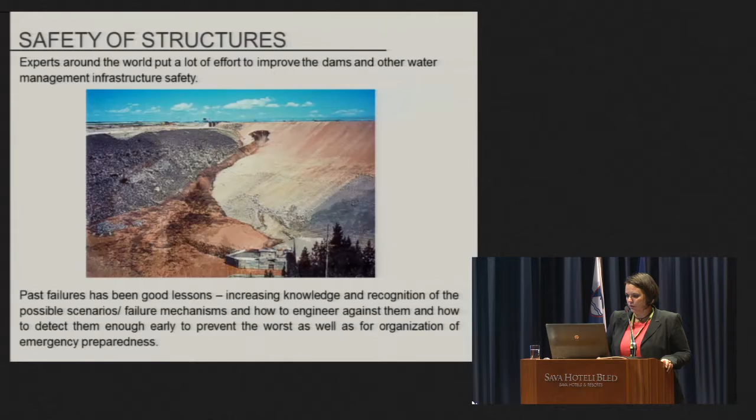So the construction of dams has been an issue from ancient times, and it has been beneficial to mankind. People still use dams as flood protective measures, as well as for other purposes such as hydropower production, irrigation, water supply, and so on. The experts agree that a well-designed, built, maintained, and operated dam exhibits a quasi-zero rate of failure.

However, there is no zero risk with dams. If we make an overview of the history of failure of dams, we see that on average, less than one dam out of 10,000 large dams fails. But no matter how small the likelihood of failure is, when these failures come, they can cause extensive damage and, in worst cases, fatalities as well. Therefore, we justifiably speak about them as critical infrastructure.

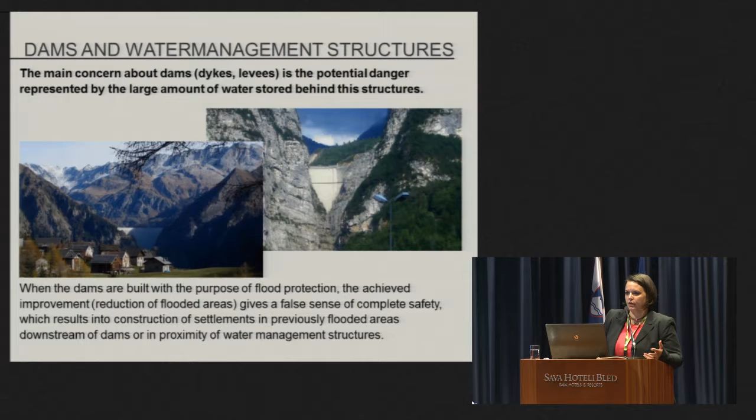So when we speak about dams for flood protection, dikes and levees, the main concern is the potential danger represented by the large amount of water which is stored behind the structures. The other point associated with these structures is that when such dams are built, they give a false sense of complete safety, which results in construction of settlements next to these structures. And the damage that can be caused is even higher.

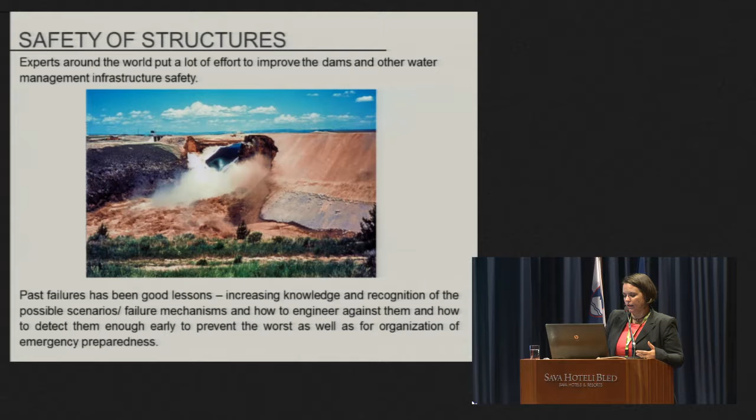So experts around the world put a lot of effort into improving dam safety, and now mostly they don't think only about structural safety; they don't use the deterministic approach and rather go to the risk approach.

So now I will talk about the VODRPEG project, which was financed by the Ministry of Defense, in which we reviewed the condition of Slovenian dams. Briefly, the VODRPEG project consisted of identification of all the dams that were possible threats, survey of the condition of these dams, review of dam break analysis, required remediation measures and emergency action plans, and raising of population awareness.

When making this overview, we found that, maybe due to lack of finance, the more critical were water management dams, since for hydropower dams more finances are available for monitoring and maintenance.

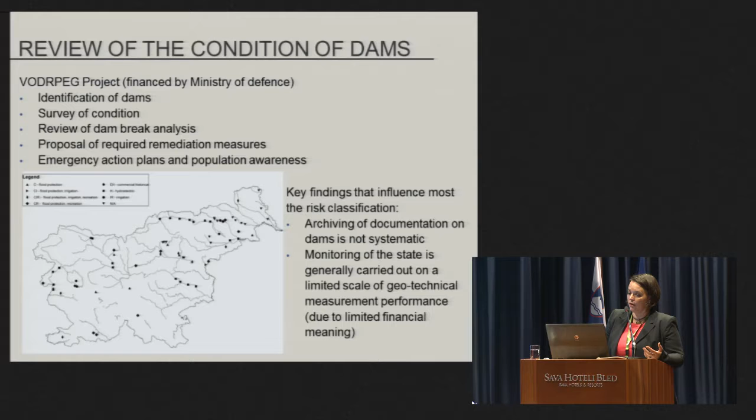The key findings that most influenced the risk classification of these dams were that the documentation on water management dams was often missing. It was scattered. The second was that monitoring wasn't carried out as it should be, also due to limited finances, and the data gained with this monitoring was not reliable enough to make a proper risk assessment.

So therefore we had to put all the analyzed dams on the same level, and we developed a qualitative assessment with which we cannot say that we were evaluating risk according to the definition, but when choosing the parameters, the damage potential was also included. So we could say that we were evaluating some hazard risk, something in the middle.

So we divided the parameters into 5 groups. The basic parameters of dams, which included height, storage capacity, discharge, and so on. Then the documentation availability, including the operational documentation, the designs, monitoring documentation, and so on. Then we analyzed the operating parameters and operating hazard, and to conclude, we made a field review and analyzed the state of structures and equipment of the dams.

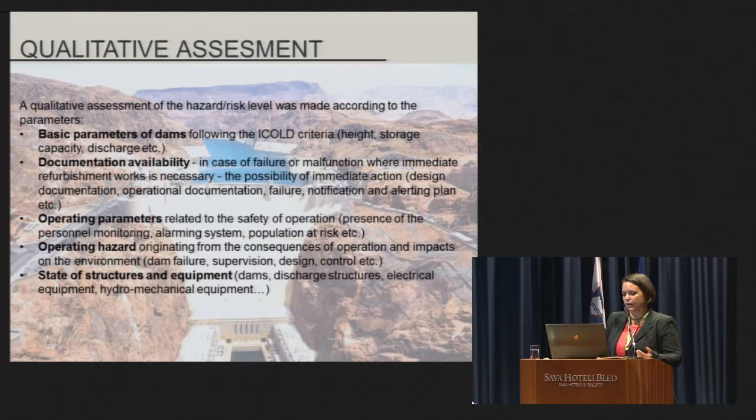So according to the significance of each parameter, we graded it into 3 levels. Unfortunately, we could not exclude the subjectivity of this assessment. It has been performed by experts, but it gave quite a good result. Finally, all these parameters were gathered together, and a 5-category risk assessment was established.

The state of the dams wasn't really nice. Many of the dams were falling into the high level or considerable level risk, and only a few dams were low risk.

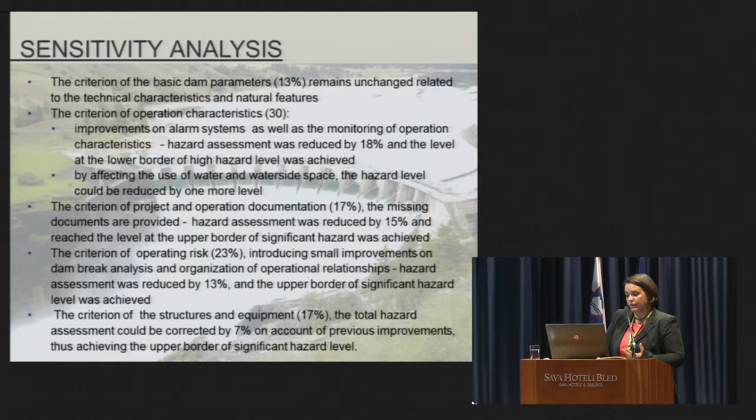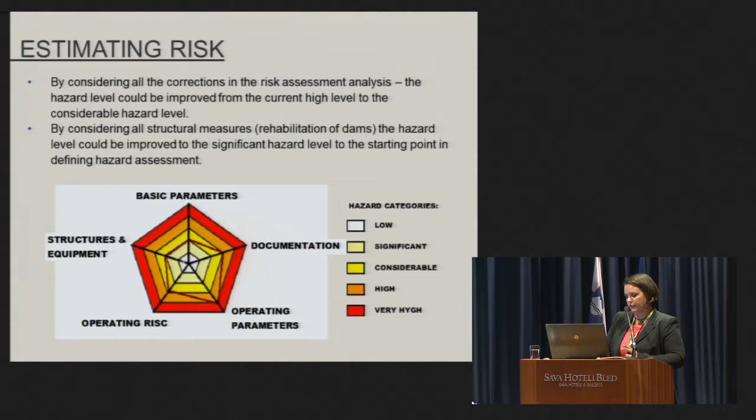After this project, the university performed a sensitivity analysis on how simple measures can reduce the risk, and as was quite logical, very small reduction could be done in the basic parameters. There we would need some constructive measures, while in the other cases, for example alarming or documentation, more could be done. This is how the results were evaluated at the end.

Unfortunately, the finances weren't found to make the complete refurbishment, but just a few works which stopped the leakage for now were performed in 2011, 2012 and 2013.

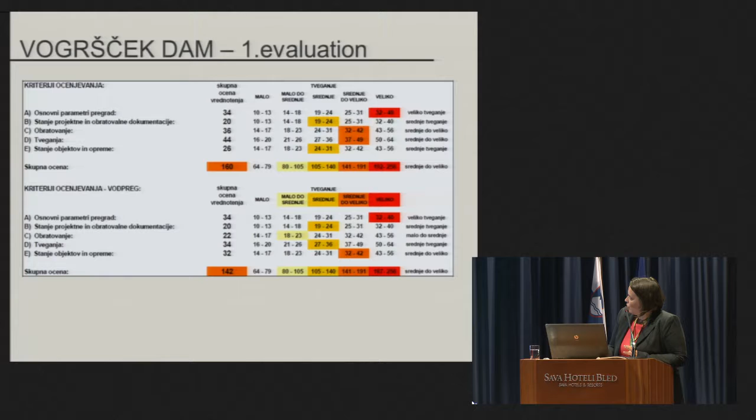Unfortunately, the table is in Slovene, but below there is how the dam was assessed in the VODRPEG project, and in the upper table there are the results after this leakage was discovered and after the performance of these intermediate measures.

Now, if we go through all the categories, you can see that in basic parameters and documentation availability not a lot could have been done. Maybe less than it could be, especially in design documentation, which is scattered, and was even dispersed during the change of the owner of the dam.

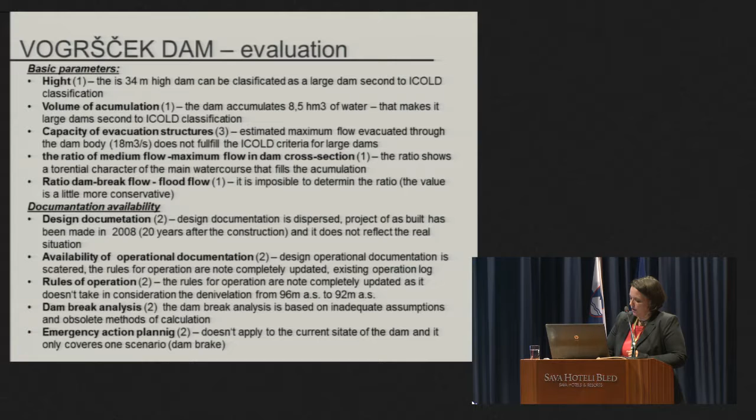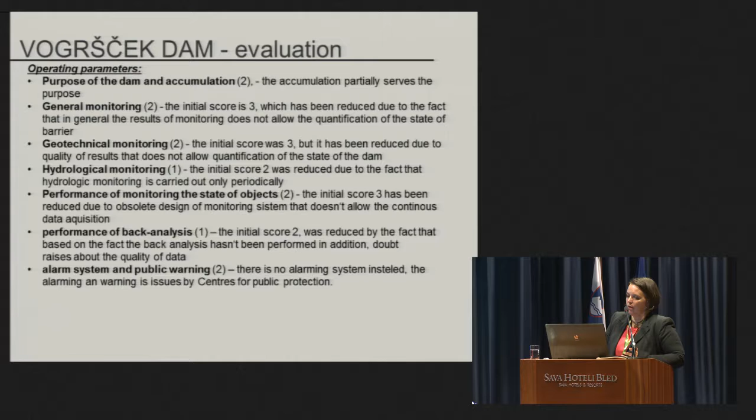While in the other parameters, operating parameters and risk arising from the operation of the dam, with small measures we could achieve some improvements, or we can see where more effort should be put.

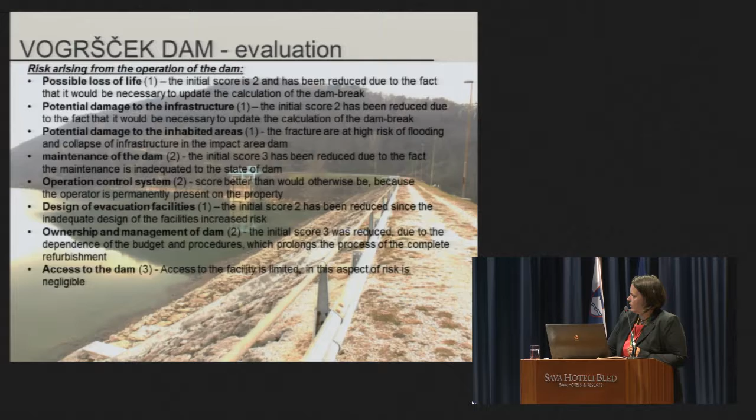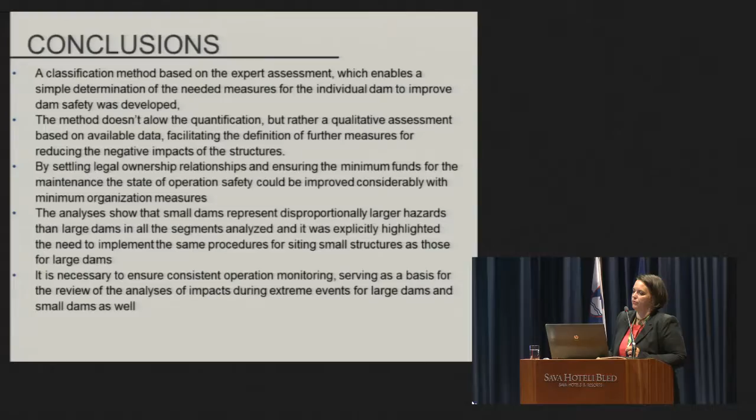I will just come to the conclusion. The classification was developed for the water management dams. Later, with the sensitivity analysis and some more works, it has been modified for flood protection measures and infrastructures. However, it is not suitable for hydropower production dams, because the results don't represent the real state of the dams as they do for the water management dams.

The good thing about the analysis is that it is quite simple, but it has to be done by experts, not by people who don't normally work with dams. And that's the dam. The accumulation.